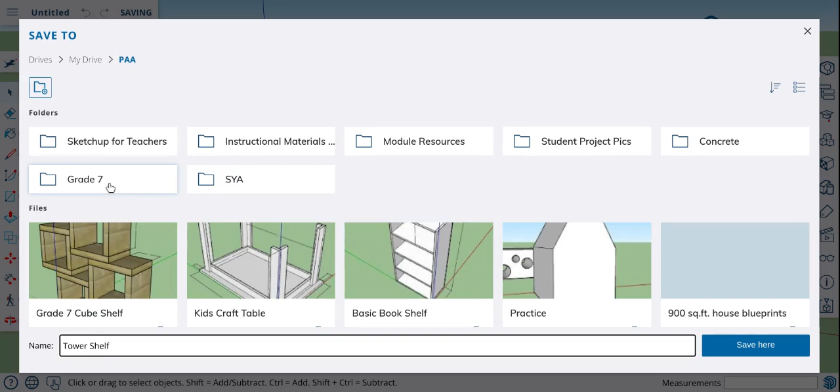So the first thing we want to do is save our project. We're going to choose where we want to save it to. This is a grade 7 project that I've designed, and this is going to step you through how to design it yourself on Sketchup.

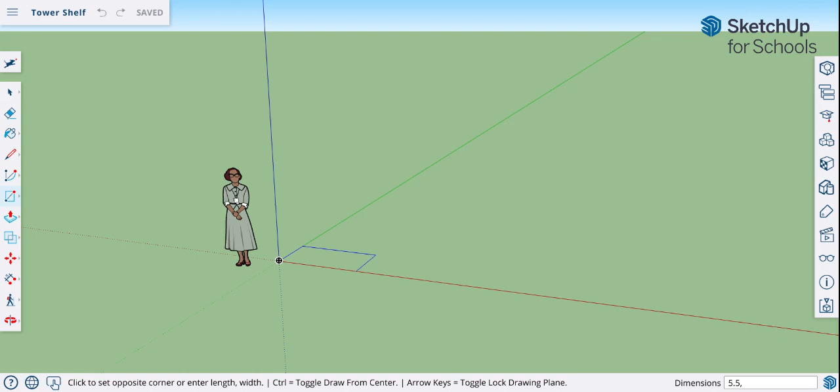The first thing I'm going to do is get my rectangle by pressing R. I'm going to click, release, drag in the direction I'm going, and type in the base of our project, which is going to be 5.5 by 0.75, or 3/4. I should say this was my base, but I'm actually going to have it as the base of our sides—it's a little bit different.

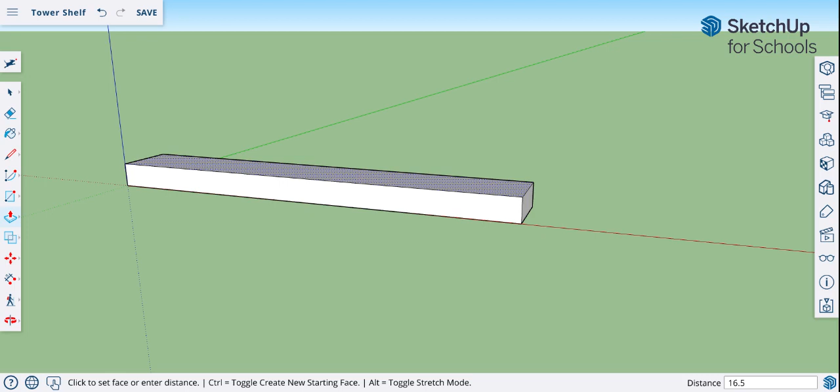We're going to zoom in, get our push-pull tool, and click on that rectangle. We're going to drag it vertical and make it so that it is 16.5 inches for the sides. And we're going to make that a component by triple clicking it.

We're going to type G, and just say OK. Next thing we're going to do is get our tape measure tool, so T for tape measure. Click on this red axis, and we're going to drag it over.

Now we want the total width of our project to be 5-inch shelves, and by one, we have 3/4 on each side, so each side is 3/4 thick. So 3/4 times 2 is 1.5. So we're going to end up making this 6.5 inches wide.

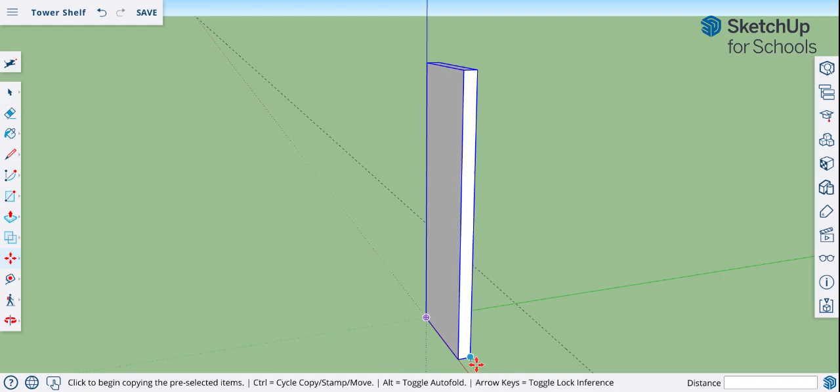So the next thing then we're going to copy—move and control to get that plus symbol by it. We're going to grab it at an intersecting point, which is right here, right along that green axis. You see how it snaps to that line?

That's what we want, and that's the advantage of making things into a component—if you're going to have multiples of them, any change you make to one is going to change the other, and it just makes things so much faster. Work smarter, not harder.

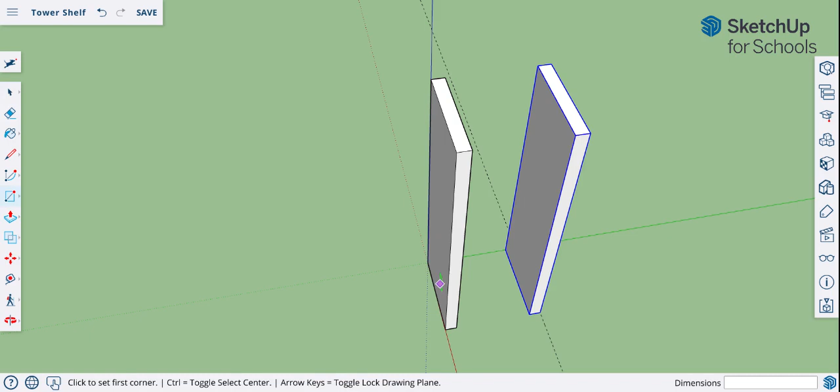We're now going to get a rectangle tool, so R again. From our top view, we're going to draw from corner to corner, and then we're going to push-pull that up, about 3/4 of an inch—not about, exactly 3/4 of an inch.

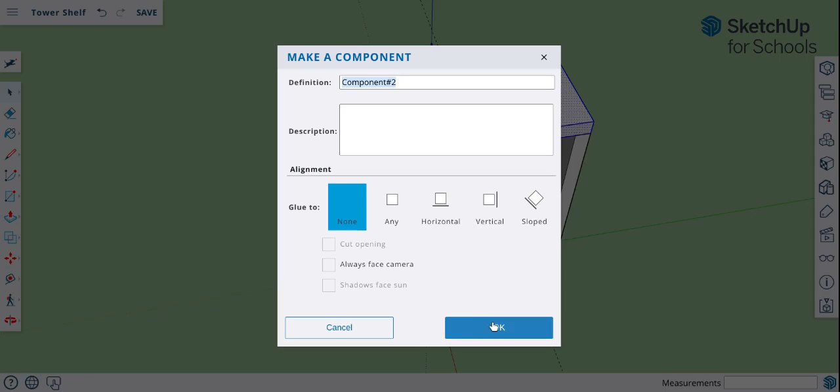So 3/4, enter. We're going to make it a component because that's going to be our top and our bottom. So G, say OK, and we're going to move control again to copy. We're going to grab that—oh, I didn't grab it at an intersecting point. I'm going to grab the top corner on this and drag it on down to the bottom. There we go. So there's the basic shell of our tower shelf.

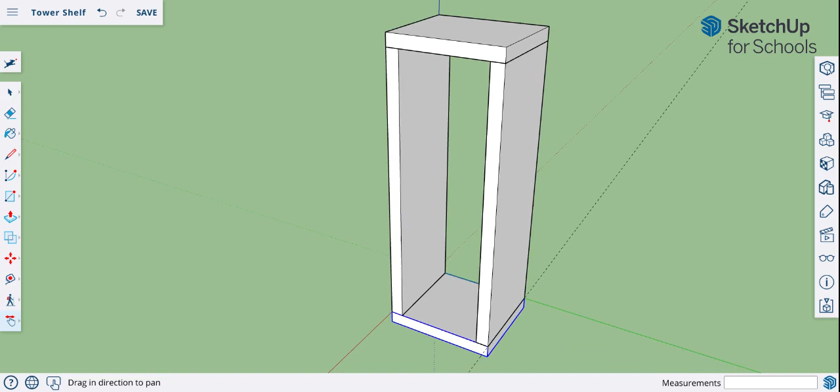I'm just going to get my hand or pan tool and pan up a little bit so you can see everything. Next thing I'm going to do is make a rectangle on the base of this, so I'm going to turn where I can see all 4 corners of the rectangle, and make a rectangle—you won't really see it, but it's there. I'm going to hit my space bar and double click it.

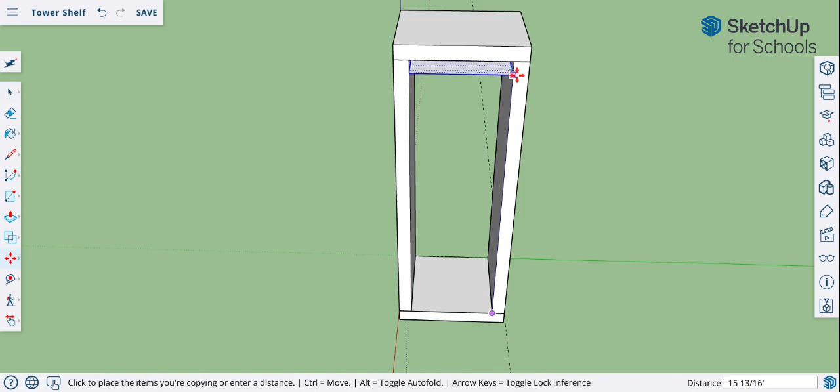Next I'm going to move control and copy that up to the top, and then we're going to divide. This is called an array, and if you don't do this all in one step—if you change your angle, your view, anything—it messes it up. So right after you copy it, you go divide, and we want 2 shelves, so we're going to divide the space into 3 equal spaces. So divide 3, enter. You can see that there's a problem with our shelves.

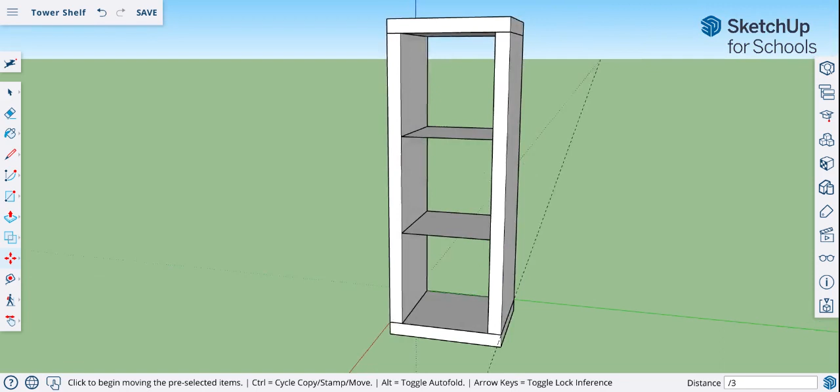They're 2D right now, so we're going to get our push-pull tool. We're going to pull one up 3/8 of an inch, which is half of 3/4—always double the denominator when dividing by 2. We're going to pull it down 3/8.

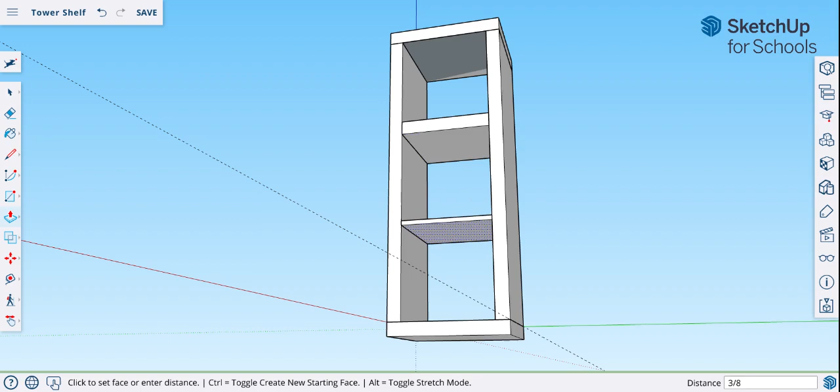We're going to do the same to the other one: go down 3/8, then up 3/8. We probably could have made these into components beforehand and just copied one over, but I'm just going to make them components at this point, even though they are identical.

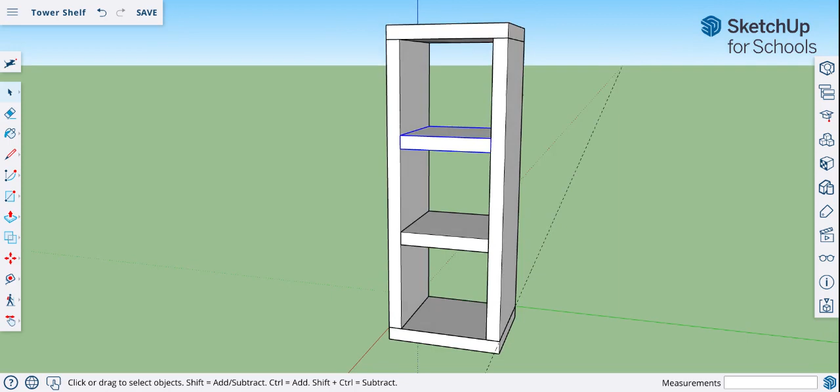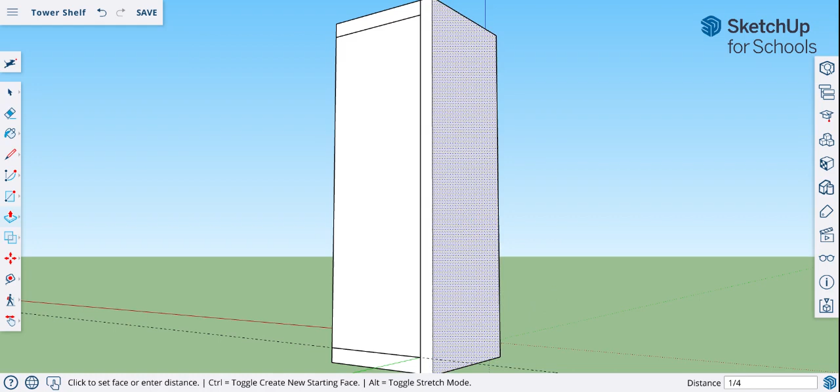Now we're almost done, we just need to put a back on it. Front or back, doesn't really matter. I'll go back around here, start with our rectangle tool, draw it from top left corner to bottom right corner, and again we have it as 2D. I'm going to pull that out for a 1/4 inch piece of plywood to go on the back. So 1/4 inch, enter, make it a component. G, enter.

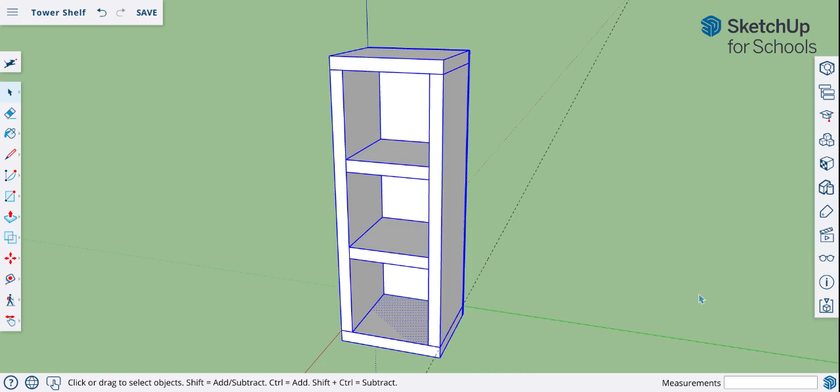Now we're ready for our paint, and then we'll be ready for dimensioning, and then the project's done. We're going to select the whole thing, go B for bucket, and go into our search under our materials. We're going to look for our wood. We could go with paint too, but I would really like my class to stain this.

So we're going to go with some stain. I'm going to go with that color. Now, if you really want to customize your colors, you can. After you've painted something, while you're in the bucket material, click on the home, and you can see that color is right there. The home means anything in the model.

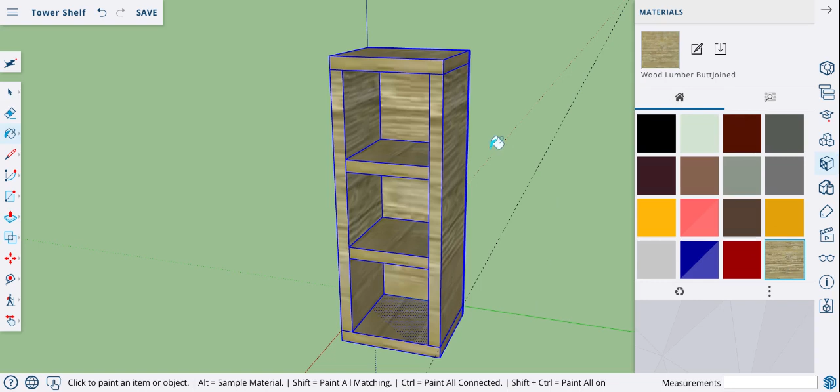We're then going to edit our color, so edit the material, and we can colorize. We can change it a little bit. I want to go a little bit more gray tone, something more barn-boardy looking. There, I think I like that. So I'm going to click done, and just click off to the side.

Next then is we're going to get our dimension tool, and unfortunately I have not found a shortcut for it, so there we go. It's right where the tape measure was. We're going to click the width of the project we need to know, the width of our top piece. We need to show the depth of it, which is designed to be made out of 1x6s, so 5.5 wide.

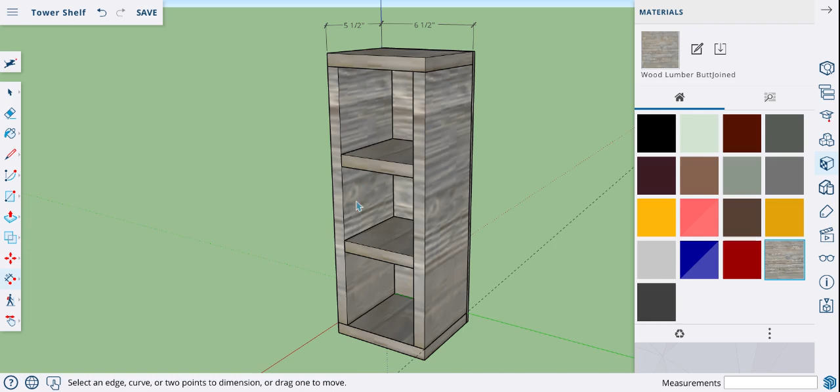We're going to show the width of our shelves. Even though we could do some math to figure that out, it's just going to make things a lot easier. And then we're going to dimension the distance between our shelves. There we go. It's always nicer if you can pull the dimensions out to the side, because then it's easier to see and they're not blocked by the color of the wood.

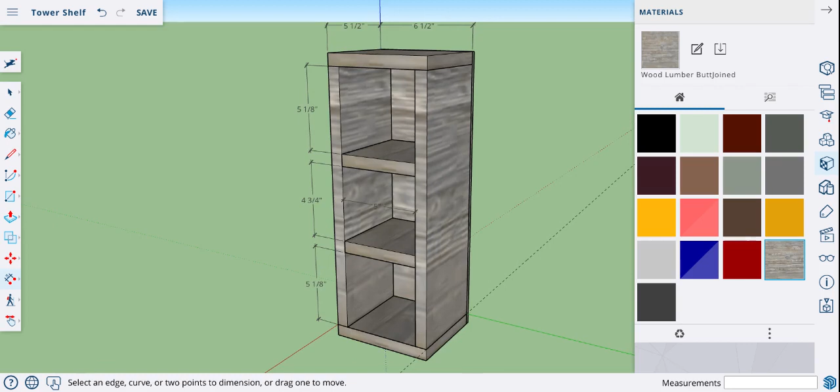And yeah, we're pretty much good. We just need to show the thickness of our material in one spot, so 3/4. Now, if I zoom out a lot, we're not going to be able to see the 3/4 because of all the lines around it. So we're just going to right click on it, and change the text position to the outside end. What happened there? Or outside start. There we go, let's go with outside start.

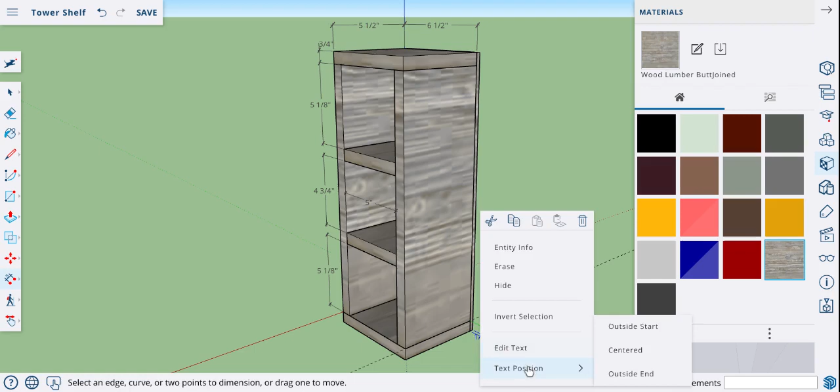And with the exception of the back, which we can also dimension, we can do the same thing again. Show that it's 1/4 inch. We can change our text position again. Voila. We can even show the width and the length of it. However, we can also just do that from the front because we know that it goes the full length, and our project height is 18 inches, like so.

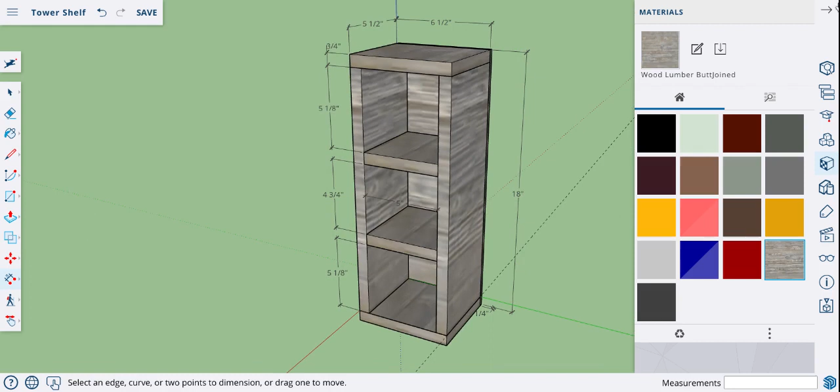So that project's done. The next thing that we need to do before building it, we're going to do a parts list or a cut list. We're going to figure out the cost together.

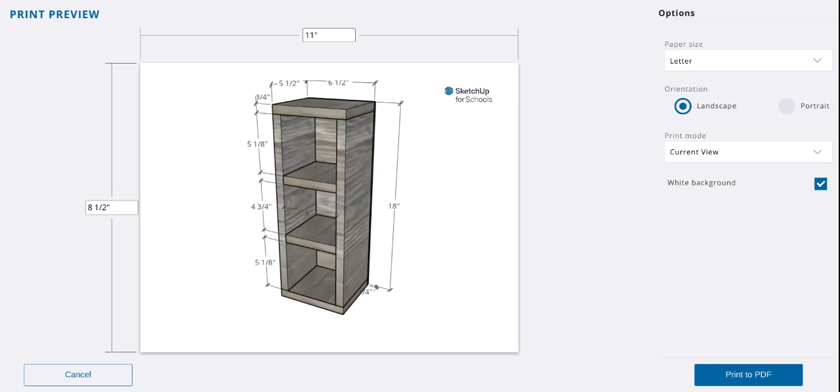In the meantime, for printing, we're going to turn off our axes and our guides, and we're going to go Control P, and we're going to make it a white background. Now, if you can't see everything, if you want to zoom in and pan and use all the different angles just to see where it looks the best, you can do that, and then just click print to PDF, and the whole thing's printed. And that is that.

So I hope you enjoyed this project, and design away.